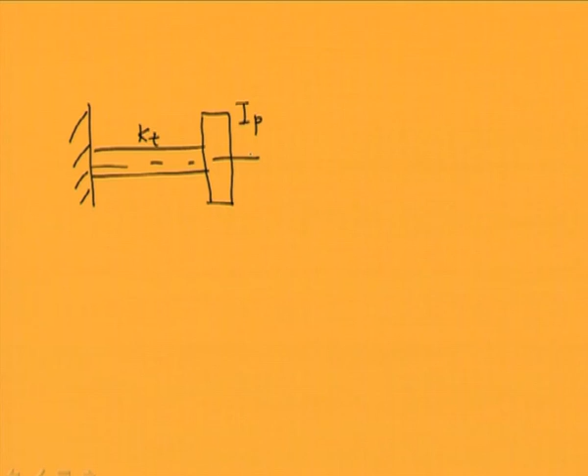If we want to see the torsional vibration in this particular shaft, then the motion of the disc about its own axis is called the torsional displacement. This particular displacement will be time dependent, and the disc will be oscillating about its mean position with this displacement.

So to analyze the dynamics of this particular disc, we need to obtain the free body diagram of this particular disc. Let us say this is the direction of the displacement we have given to the disc.

So opposite to this, we will be getting a force which will be given by the shaft to the disc, and from Newton's second law we are able to obtain the equation of motion of this particular disc.

So the sum of the external force acting on this particular disc can be written as: the external force acting onto the disc should be equal to the inertia moment of the disc. This is the inertia moment of the disc.

So the equation of motion can be written as this - this is a more standard form of the equation of motion.

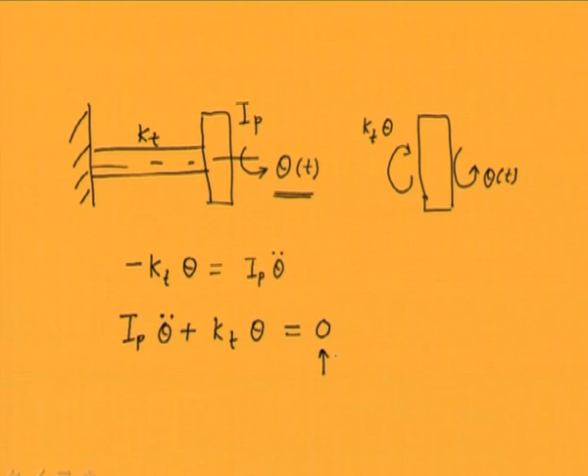This particular equation of motion is homogeneous since we have no forcing in the system, and the solution of this we expect to be harmonic motion because the system is undergoing free vibration.

So the solution can be assumed as amplitude and some harmonic term like this, and here we can substitute the solution in the equation of motion. For that we need the double derivative of the solution, so both quantities we will be substituting in the equation of motion.

So we will get it in simplified form. Now, since theta cannot be 0, for a non-trivial solution the quantity within the bracket should be 0, and that will give us the natural frequency of the system.

This, where kT is the torsional stiffness of the system, and IP is the polar mass moment of inertia of the disc.

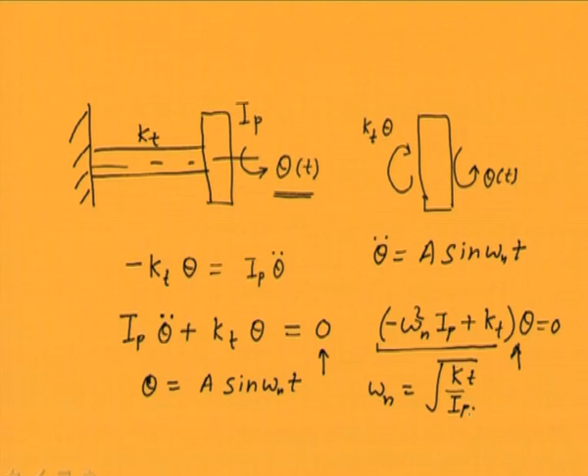Let us consider another system in which we have two discs connected by a single shaft.

So this is disc 1 having polar mass moment of inertia IP1, and this is another disc having polar mass moment of inertia IP2. The stiffness of the shaft is, let us say, kT.

Now to analyze this system we need to draw the free body diagram of both the discs first, and then we will be writing the equation of motion. This is the free body diagram of disc 1, in which the first disc is having displacement theta 1, and the second disc is having displacement theta 2.

This is the positive direction of theta, and there will be a torque from the shaft coming, which is given as this. Here, because the two discs have different displacement, the actual twist of the shaft will be the relative displacement between the two discs into the torsional stiffness.

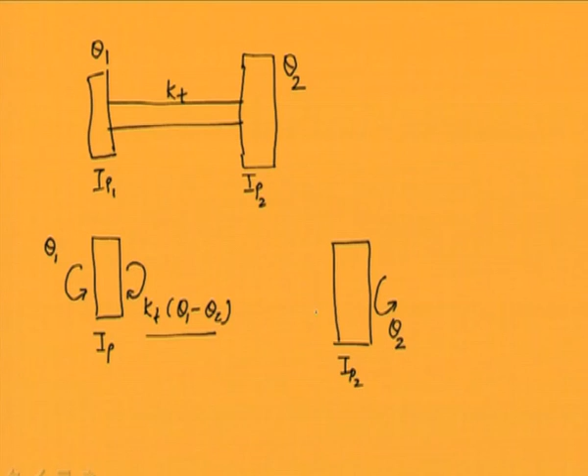Another free body diagram, of disc 2, can be drawn. Here let us say it is having displacement theta 2, and will be having a torque which will be opposite to the displacement direction, given like this.

Now using these two disc free body diagrams we can obtain the equation of motion. Let us consider the first disc. We can write minus kT is the external torque on disc 1, which should be equal to the inertia term of disc 1, which is IP1.

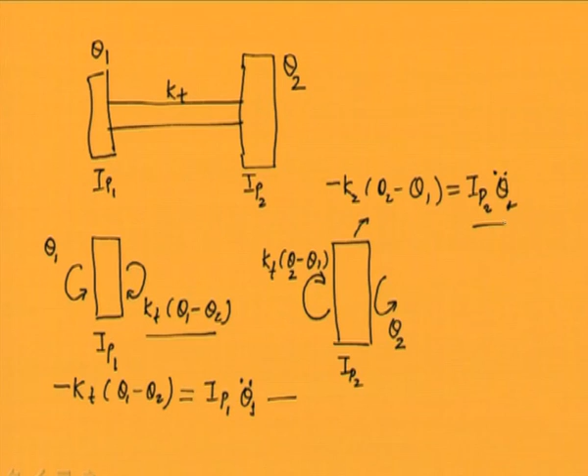For this particular disc we can write the equation of motion on similar lines, and for the second disc as well. These two equations can be written in a standard form like this. Now these two equations are the equations of motion of the two discs.

The solution for that we can assume as a harmonic motion taking place, because we are looking into the free vibration of these two discs. So this is the solution for the free vibration for both discs, as we did for the single degree of freedom system also.

These two solutions can be substituted in the two equations of motion, and that will give us a solution in this form. I have put these two equations in a matrix form, and the entries in the matrix will be the natural frequencies.

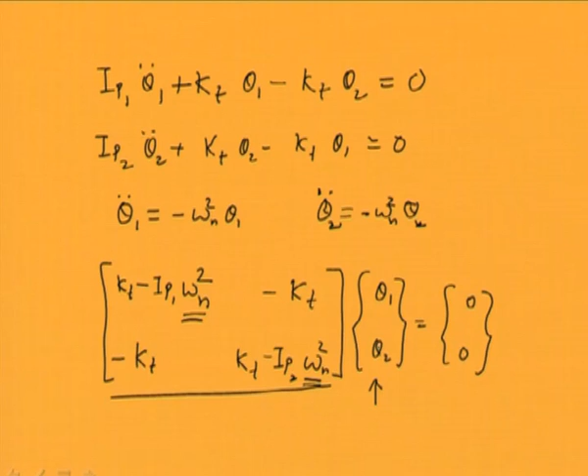For that we have to go back to the previous equation, in which we will be substituting omega n in these terms, and then we will be solving for theta 1 and theta 2. So let us take the first equation.

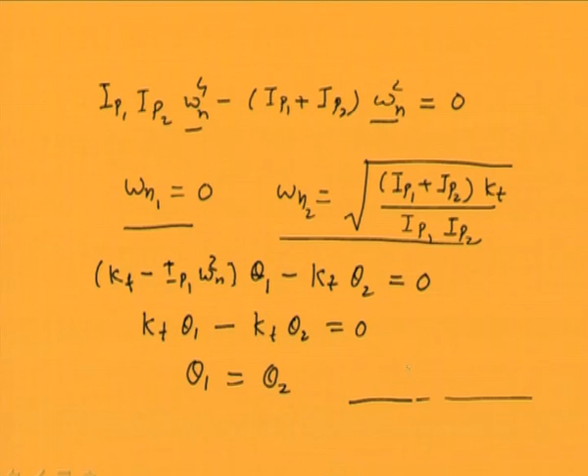So when we substitute omega n equal to 0, we get kT theta 1 minus kT theta 2 equal to 0. You can see that we got theta 1 equal to theta 2 for this, and if we want to draw the mode shape, this is corresponding to theta 1, this is corresponding to theta 2 — they are equal. So this is the mode shape for the first natural frequency.

This corresponds to the rigid body mode, in which we do not have any twist of the shaft. Both the discs have the same displacement, so there is no twist of the shaft, and it has no practical value, because no stresses are generated in the shaft. Let us see the second mode shape, which has some practical value.

So we again write the same equation, and here instead of omega n square we substitute the actual value of the natural frequency. If we solve this equation, let us solve at least one more step on this.

You can see that this term gets cancelled, so this equation is getting simplified. So kT times IP2, minus IP1 kT minus IP2 kT, theta 1 minus kT theta 2 equal to 0. So here this particular term is again getting cancelled.

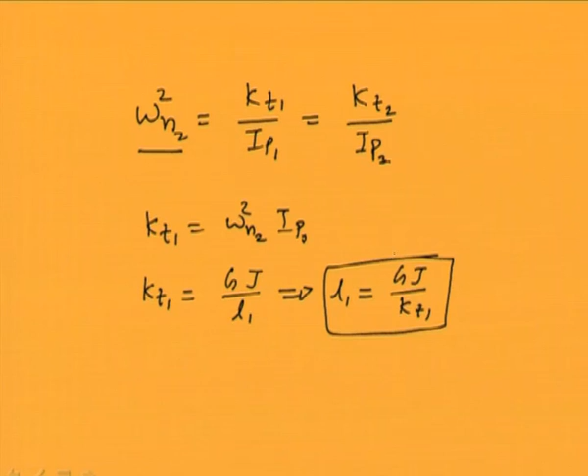On the same line we can also obtain the position of the node from this, but this is a redundant equation.

Now we will consider another kind of system in which two disks are there, but the shaft has different dimensions in between. This type of shaft is called a stepped shaft, because in some applications we may find these kinds of shafts. Let us first see the system.

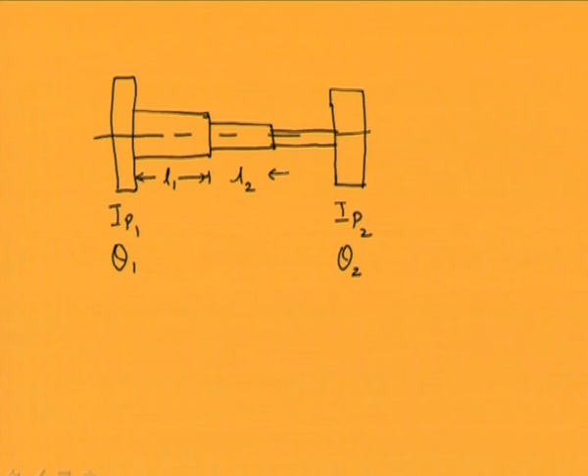This is the axis of the shaft. This is one segment of the shaft, then there is a step like this, then another step, and then there is a disk here. So disk ip1, ip2, and corresponding displacements are theta 1 and theta 2. Let us say the lengths of these are given as this, and they have different diameters also.

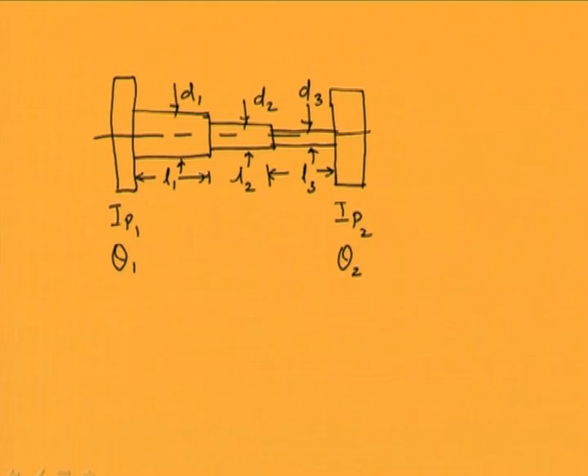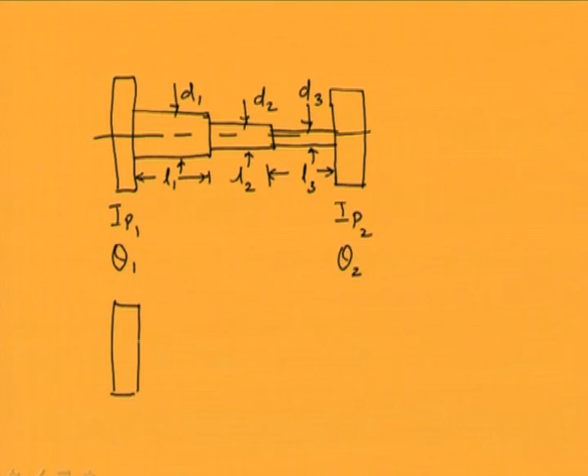This particular system is exactly similar to the previous case, only the difference is here we have different shaft diameters. So it will be very good if we can convert this system to an equivalent uniform shaft system, that means converting this particular system to a system like this.

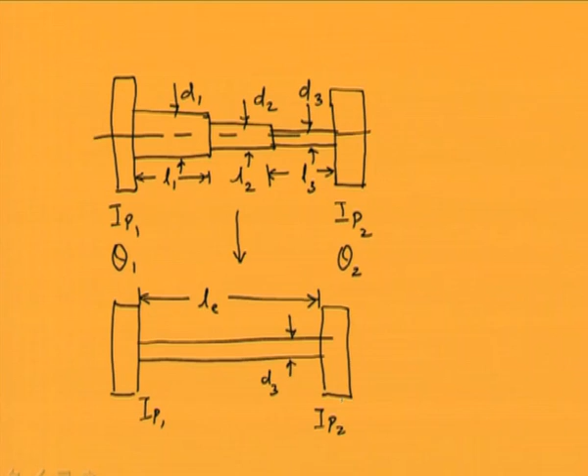Let us say this equivalent shaft diameter is d3, and this is the equivalent length of the shaft. So if we can convert this system to this, then the analysis which we performed in the previous section is valid. Let us see how we can do it.

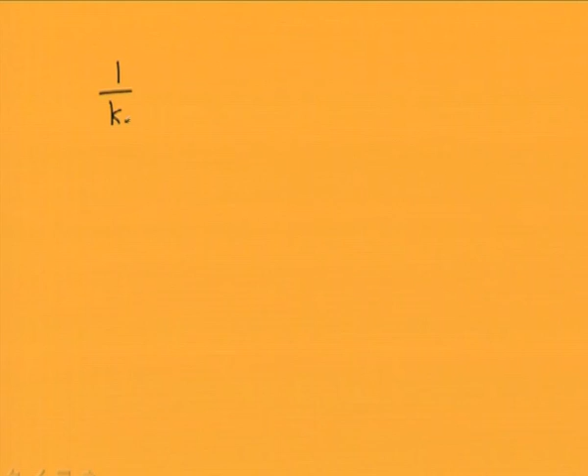To convert the stepped shaft into a uniform shaft, the main aim is that because the shaft gives only the stiffness for torsional vibration, if we can have some kind of equivalent stiffness, then we can obtain the equivalent system.

Because these stepped shafts are connected in series, we can write the equivalent stiffness of the uniform shaft like this, because we have 3 stepped shafts. These are the torsional stiffness of the 3 stepped shafts, and this is the equivalent stiffness of the overall system.

This can be expressed because we know K is given by Gj by L, where G is the modulus of rigidity, J is the polar moment of area, and L is the length of the shaft segment. Using this equation, it can be converted, and because G is common, I have eliminated it from both sides.

Which can be written as like this.

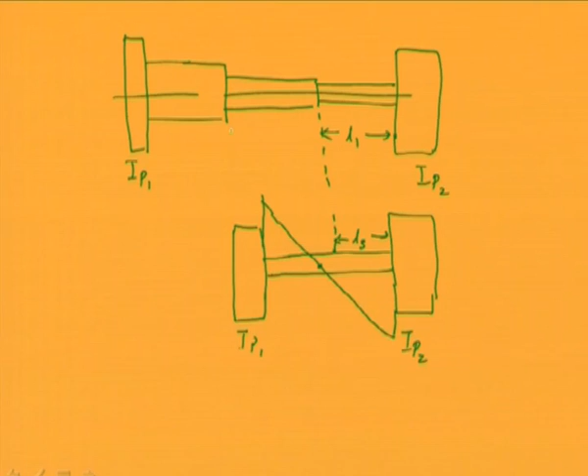the various positions of the shaft onto the equivalent system, if this is L3 in the equivalent system, that will remain L3. Corresponding to this second segment, let us say this is L2, and this is L equivalent. And the third one is corresponding to L1 equivalent; in the actual system it is L1.

Now let us say the position of the node on the equivalent system is A from this position LE1. So in the equivalent system we can locate the node position as we did in the previous case.

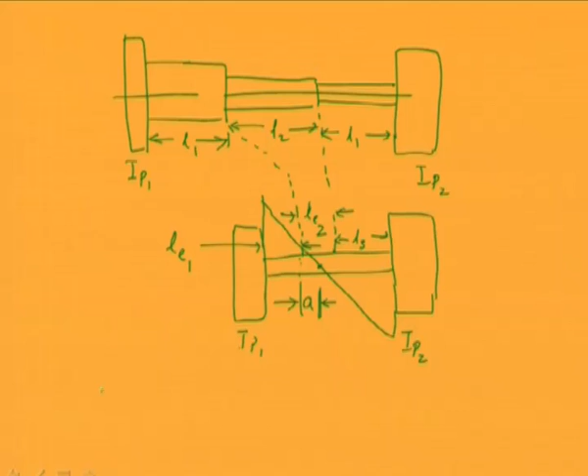Where KT1 is the stiffness of the first part of the system, this one up to this, and from here we can obtain A because other quantities are known. Now we need to find out the equivalence of this in the actual system.

Where is the node in the actual system? To find out the position of the node in the actual system, let us see the previous relations which we had for the equivalent system for segment 2, this. So if A is the equivalent node position for segment 2,

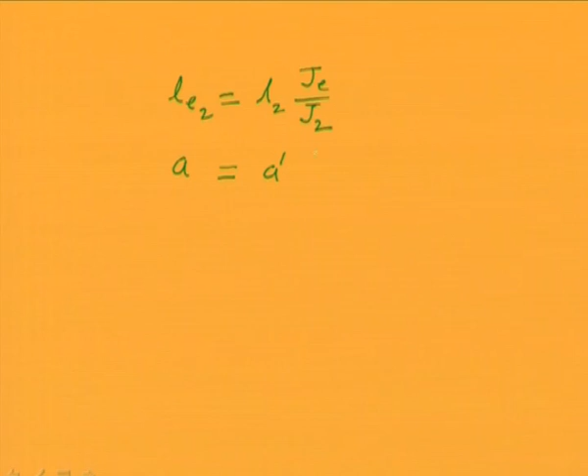then let us say A prime is in the actual system. Similarly, if from the right side of element 2, the node position is given by B in the equivalent system and B prime is in the actual system, then we can have this relation.

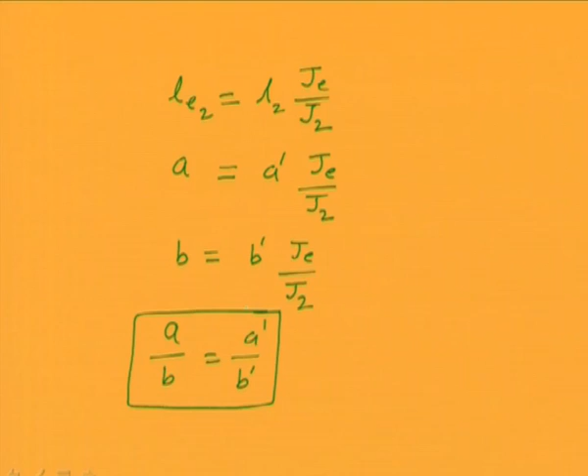And if we take the ratio of these two equations, we will get A by B is equal to A prime by B prime. So you can see that once we have located the node in the equivalent system, in the actual system also the node positions will be there in the same proportion, where A prime will be this and B prime will be this.

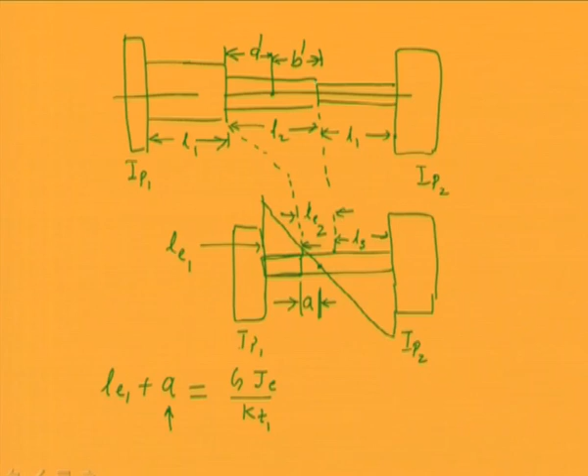Now we will consider the 3 rotor system, and in this particular 3 rotor system the basic principle of the 2 rotor system is equally valid here. Here 3 rotors are connected by 2 shafts, so if we want to see the motion, especially how they will be vibrating in free or normal modes,

either they can have one node in between the shaft or they can have 2 nodes in the shaft. If they have one node in the shaft, then obviously the 2 extreme discs will be having opposite phase. This will be seen in more detail. And if there are 2 nodes in between the shaft, then the 2 discs at the extremes will be having the same phase. So let us see this particular analysis.

So this is one rotor connected by a shaft. This is another rotor. For simplicity we are considering the uniform shaft, but we can also take non-uniform shafts, though then we have to go for the equivalent system in that case.

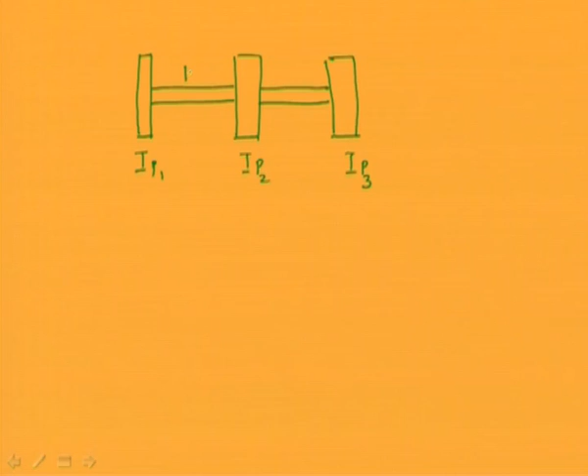So let us say their mass moment of inertia are like this, and these are the torsional stiffness of the shaft. Lengths of the shafts are, let us say. Now,

if we directly want to go for the mode shape analysis first, and then from there we will try to find out the natural frequency of the system. Let us say there is only one node in this particular system, then how does the mode shape look like.

So let us say the node is here. So this is the mode shape which will be. So here we have theta 1, theta 2, theta 3. Theta 3 is negative. As I said earlier, when there is one node, then theta 1 and theta 3 will be having opposite phase.

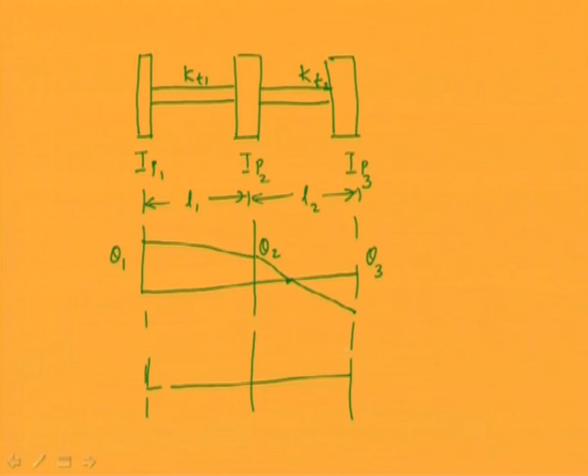In another case, when we have two nodes, one node is here, another node is here. Let us say the position of those nodes are LA from the left hand side and LC from the right hand side. On the same lines, we can write this as LC is the position of the node from the right hand side.

This is regarding the mode shapes. We have seen that it can have either one node in between the shaft or two nodes in between the shaft. So let us consider the general case when it has two nodes in the shaft. How can we analyze this?

The left part of the shaft will be a cantilever because there is no displacement at this point, so we consider this as a cantilever beam. Similarly, the extreme right position can also be considered as a cantilever beam. In between, the middle portion will be a fixed rod with the disc in between those fixed ends. So there are three systems now, but because they are vibrating in natural mode, the natural frequency of all these systems will be the same. Let us write these equations of motion one by one.

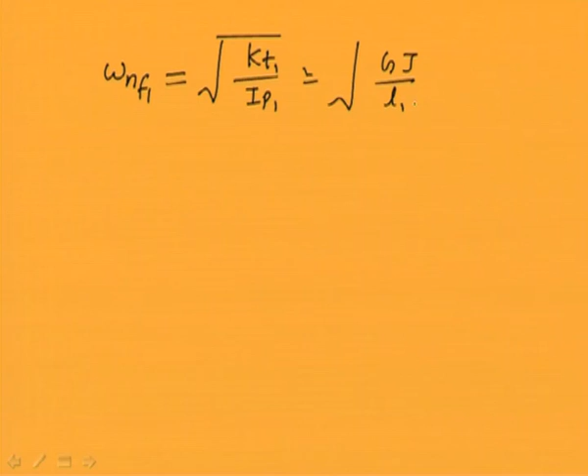For the disk at the extreme left, we can write the frequency equation as shown, and if we substitute for the torsional stiffness, because L1 is the length of the left hand side cantilever beam.

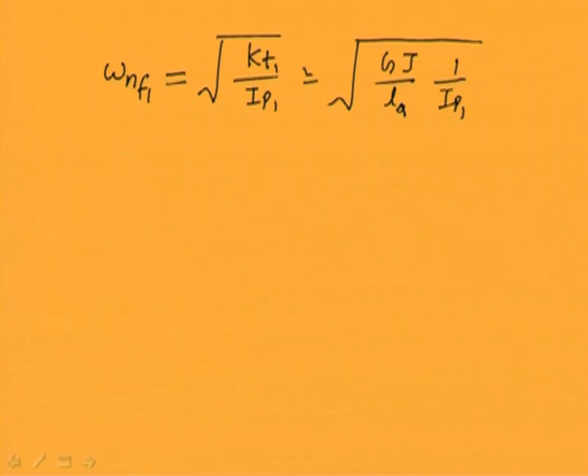On the same line, we can write for the third disc, and this is the natural frequency for the third disc. For the middle rotor, we have the natural frequency, where this kt2 is given as shown.

Now these three frequencies for the three discs, because they belong to the same system, their natural frequency should be the same. So we can equate these three equations, and our aim is to obtain either LA or LC. Eventually, when we equate these three equations, we get a quadratic equation in terms of LA or LC. Let us see the steps.

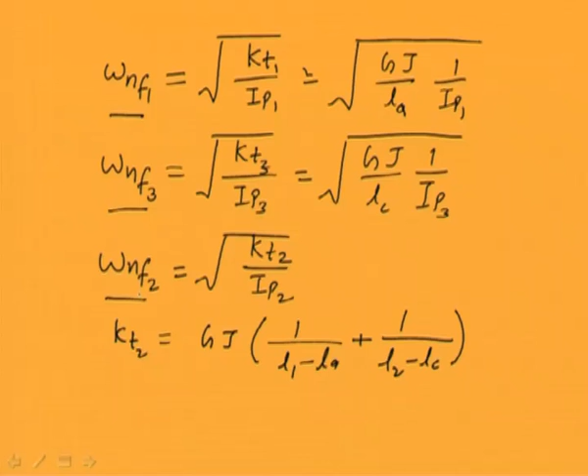If we equate the natural frequency of the first disc and the third disc, we get this equation. And if we equate the natural frequency of the first and the second disc, we get an equation which can be written as shown.

This particular equation contains both LA and LC, so from this equation we can eliminate LA. To do this, we substitute LA equal to LC times IP3 by IP1, and if we substitute this here, here and here, and solve it, we get the following equation.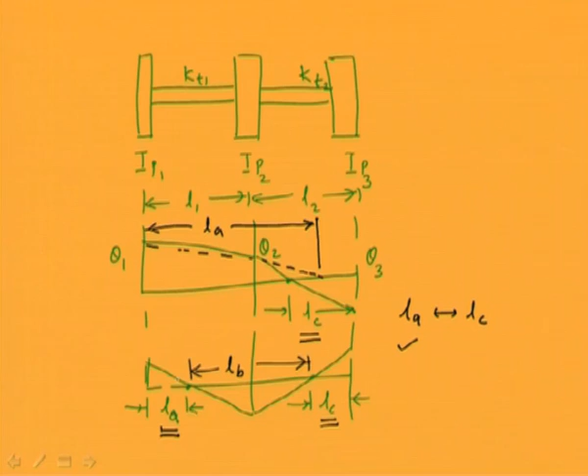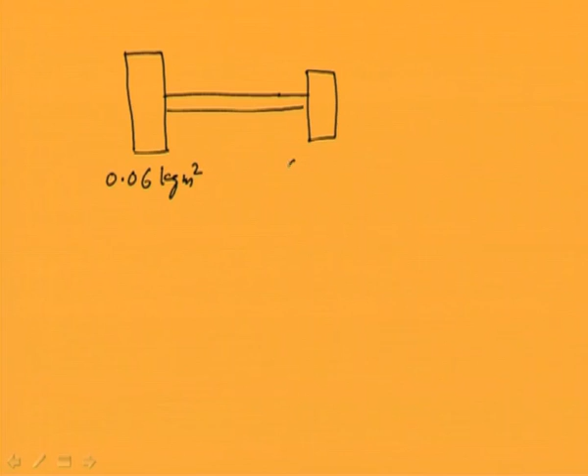Now let us consider some examples so our concepts become clearer. First we consider a two degree of freedom system. The first shaft has a mass moment of inertia of 0.06 kg meter square, the second shaft has 0.02 kg meter square, the diameter of the shaft is 0.1 meter, and the length of the shaft is 0.6 meter. We need to obtain the natural frequency of this system.

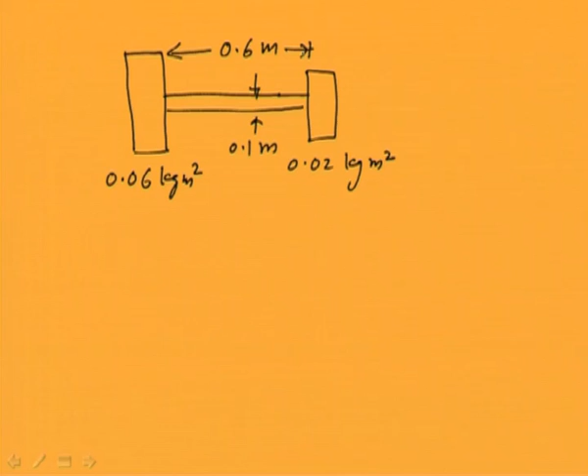Let the modulus of rigidity be given as 0.8 times 10 to the power 11 Newton per meter square. With this information we can calculate the polar moment of area of the shaft. Since we know the diameter, it comes out to be this much.

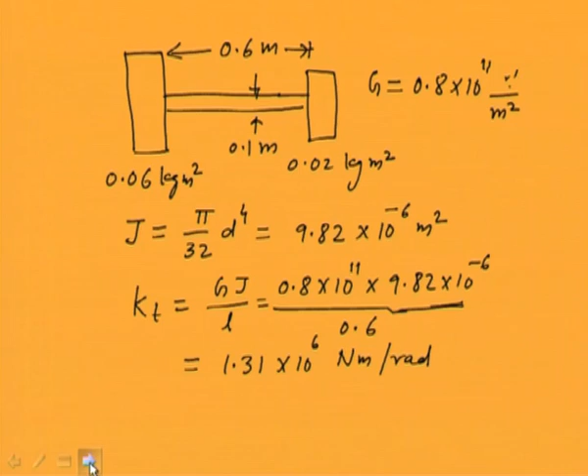Because the torsional stiffness is given by G times this expression, we can substitute these quantities here. The length of the shaft is 0.6, so this gives us the stiffness of the shaft as shown, in Newton meter per radian. Now we will substitute these values in the natural frequency equation.

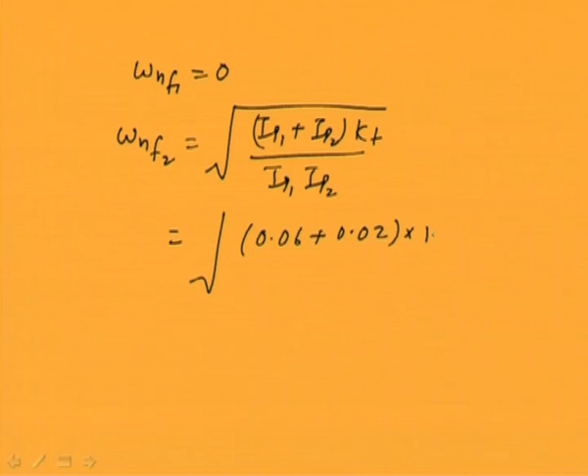The first natural frequency remains 0, the rigid body mode. The second natural frequency we obtain is IP1 plus IP2 times kT divided by IP1 IP2. Substituting these values: 0.06 plus 0.02, into 1.31 times 10 to the minus, 10 to the 6, divided by 0.06 into 0.02, this gives us 9345.3 radians per second as the second natural frequency.

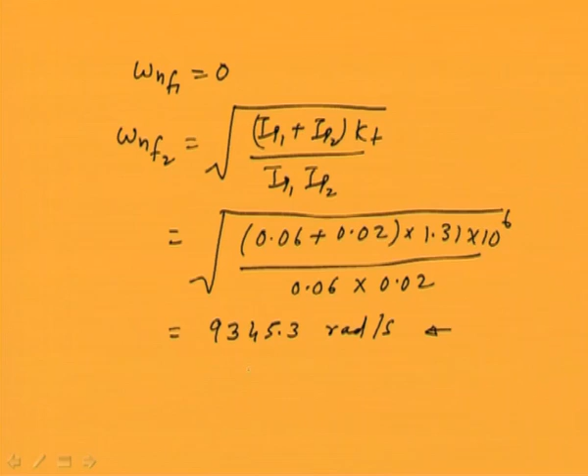This natural frequency is quite high, in the range of 9000 radians per second, compared to transverse vibration, where generally these natural frequencies are very high. Now let us see the mode shapes.

Corresponding to the first natural frequency, both displacements will be the same. So the mode shape remains like this, both theta 1 and theta 2 are same.

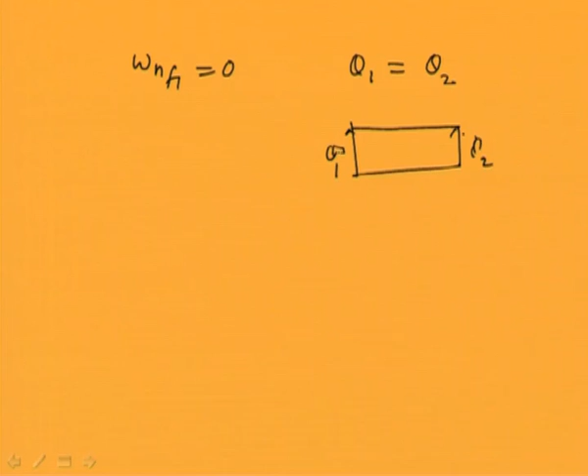Corresponding to the second natural frequency, we will be having a mode shape which is 0.06 by 0.02, minus, so it comes out to be minus 3. So the mode shape will be something like, if we have 1 here, the second will be having minus 3 displacement. This is corresponding to the second natural frequency mode shape.

Now we will consider another kind of system in which gears are there, and in such systems also we face the problem of torsional vibration. Our aim here would be to obtain the natural frequency of the system so that we can avoid any resonance condition. In these kinds of systems, because of the gear, we will be having different speeds of the shafts, due to the gear ratio, so there will be either speed reduction or speed increase in the shaft.

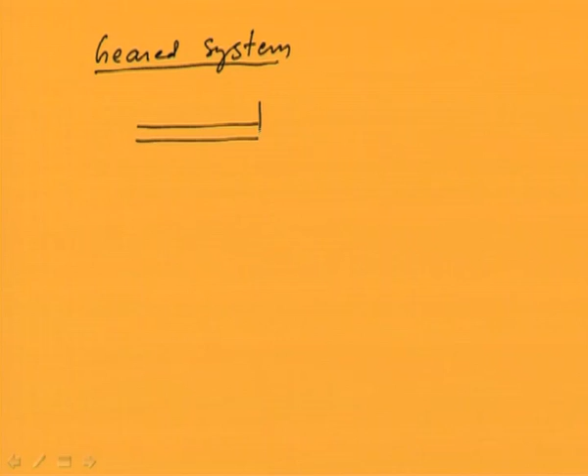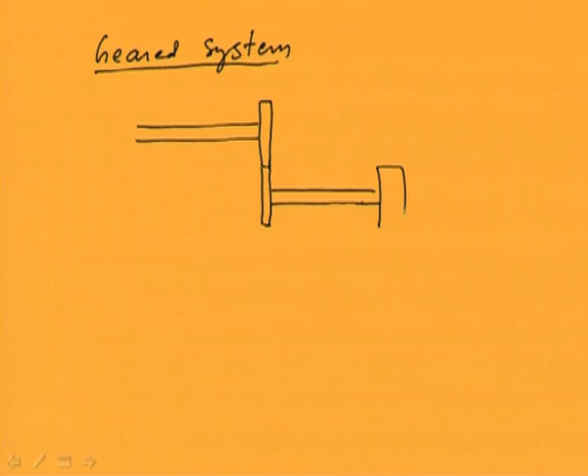Let us say we have one shaft connected by a gear, and then with another gear we are transmitting torque to another shaft. Let the mass moment of inertia of this particular rotor be IP2, and here there is another rotor or disc having mass moment of inertia IP1. We are assuming that the polar mass moment of inertia of the gears is negligible, but later on we can add that also. For simplicity in this analysis, we are not including the polar mass moment of inertia of the gears.

So this is the gear system in which we have speed of this shaft as omega 1. The twist of gear 1, the torsional displacement of gear 1, is theta 1, and the torque coming onto the shaft at gear 1 is, let us say, T.

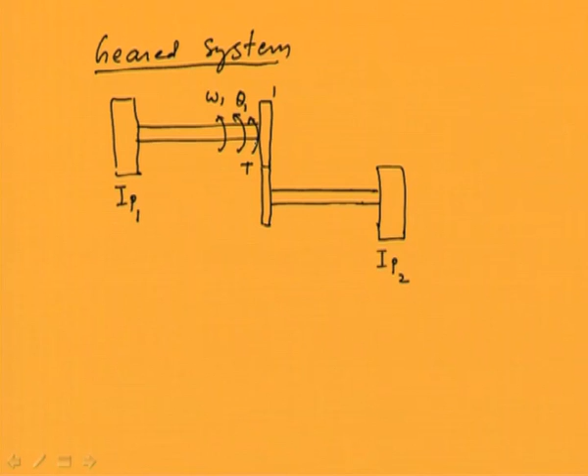Now, because of this gear pair, there will be a change in the angular velocity of shaft 2, let us say that is omega 2, and there is a change in the torque, that is Nt, where N is the gear ratio. There will also be a change in the angular twist of the shaft, let us say theta G2, which is related to theta G1 by the gear ratio. Actually this is theta G1, to distinguish between this rotor and the gear displacements. Now we want to analyze this particular gear system.

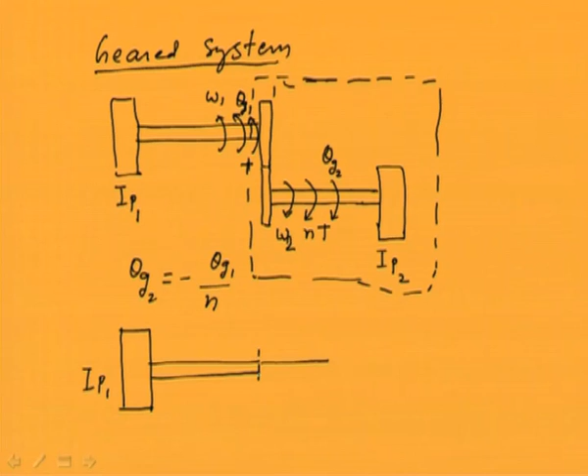So if we consider this particular system enclosed in a black box, we want to find out an equivalent system in which, let us say, this is IP1, this is the shaft, and after this, corresponding to this particular box, we have an equivalent stiffness Ke and an equivalent polar mass moment of inertia.

So if we can convert the geared system into this particular system, we find that we already analyzed this two disk system. So our analysis will be valid, whatever we covered previously, for the geared system also, if we can find the equivalence. So our aim would be first to obtain the equivalent system of the geared system, and here, for finding the equivalence, we will be having two quantities of concern.

One is the strain energy in the system, so whatever strain energy is there in the original system should be equal to the strain energy in the equivalent system. Similarly, the kinetic energy of the actual system and of the equivalent system should be the same, and based on these two energies we will obtain what should be the equivalent stiffness of the equivalent system and what should be the polar mass moment of inertia of the equivalent system.

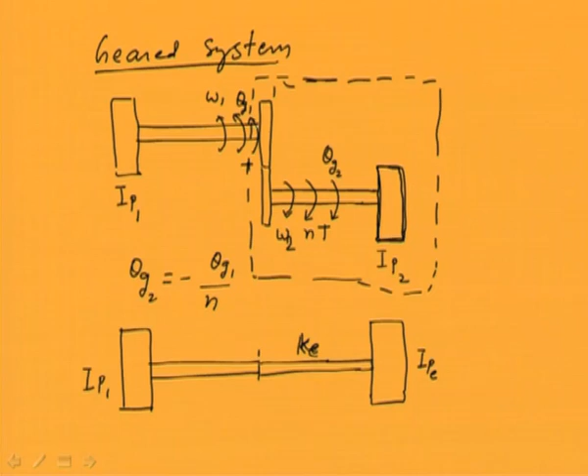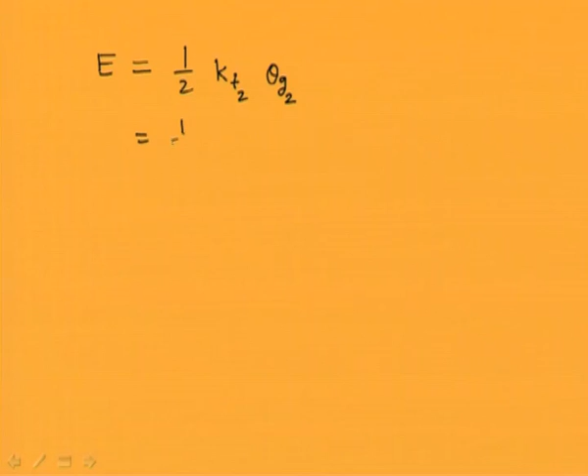So what we are doing is fixing the IP to the disk 2 by some means, and we are giving gear 1 a theta G1 displacement. We will try to find out how much strain energy is stored in the shaft 2, given by half the stiffness of the shaft times the angular twist theta G2 squared. We have the relationship between theta G1 and theta G2 like this, and since this is squared, the minus sign has no meaning here. So this is the strain energy stored in the actual system.

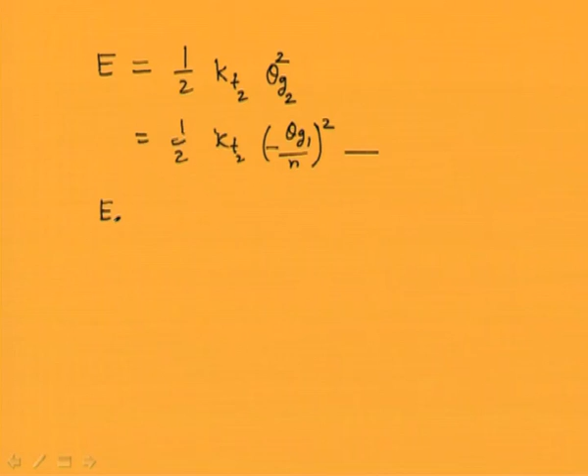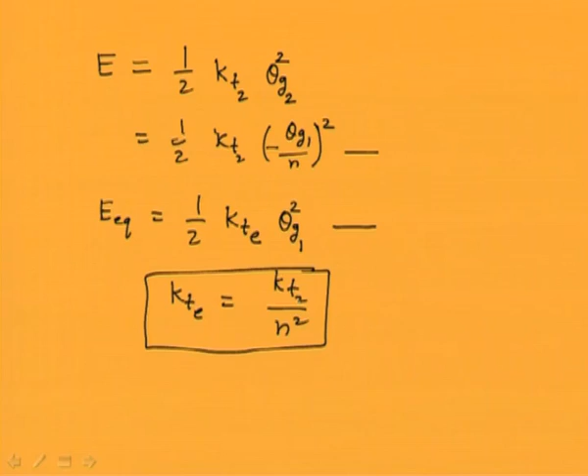Now the strain energy in the equivalent system can be written using the torsional stiffness of the equivalent system, getting the same twist as gear 1. If we equate these two energies, we get this relationship: if we divide the torsional stiffness of the actual system of shaft 2 by the gear ratio square, we get the stiffness of the equivalent shaft system.

To find the equivalent polar mass moment of inertia of the equivalent system, we have to equate the kinetic energy of the actual system and the equivalent system. So first let us see the kinetic energy as omega 2 prime square, where omega 2 prime is nothing but the actual speed of the rotor plus its angular twist.

And the kinetic energy of the equivalent system can be written as omega 1 equivalent square. Here omega equivalent is omega 1 plus theta G1 dot, which is the angular displacement of gear 1.

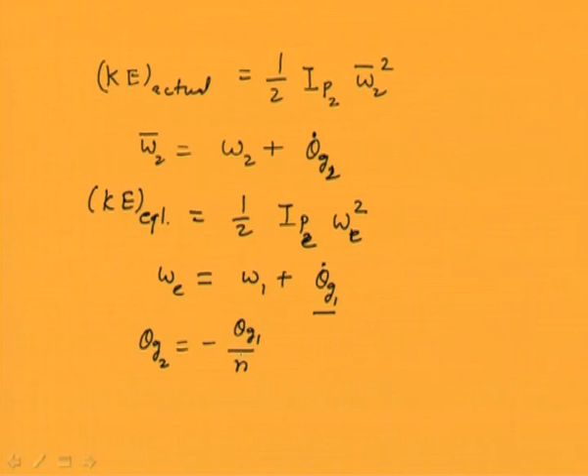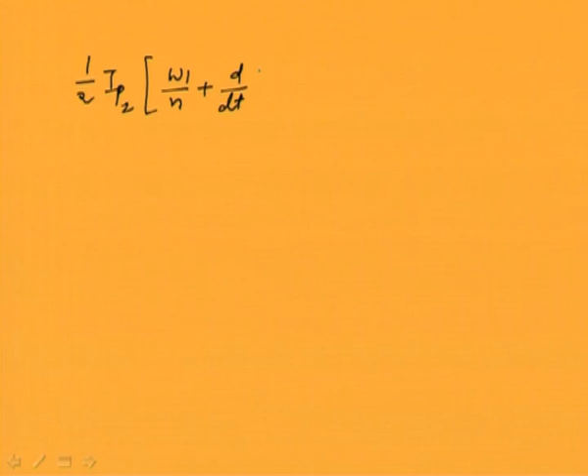Now because we have a relationship between gear displacement 1 and gear displacement 2, we can substitute these equations in the kinetic energy and equate them. So this is the kinetic energy of the actual system, in which we replace omega 2 by omega 1 by n, plus theta G2 replaced by this quantity, which is theta and its time derivative, and the whole thing squared, should equal the kinetic energy of the equivalent system.

Now if we simplify this, we can see that the equivalent polar mass moment of inertia comes out to be IP2 by n square. So here also we can see that the polar mass moment of inertia of the equivalent system can be obtained if we divide the polar mass moment of inertia of the actual system by the square of the gear ratio.

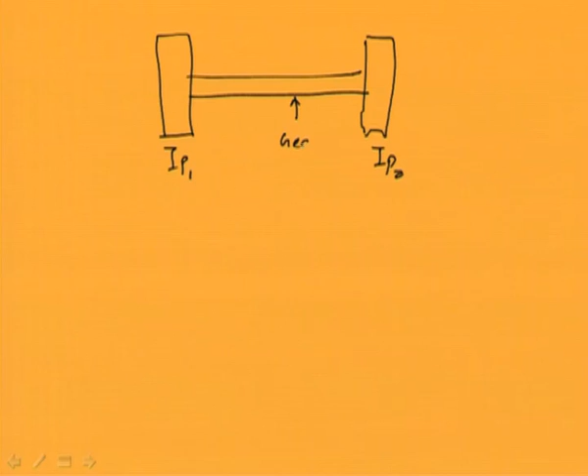Once we obtain the equivalent system, which has one disk here, another disk here, and the gear somewhere here, since we already analyzed this system previously, the mode shape can be obtained from this. This particular mode shape is for the equivalent system.

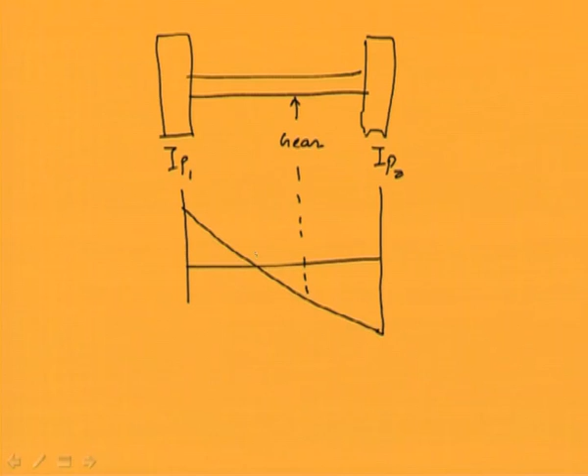Now how do we obtain the mode shape for the actual system? Because this is the location of the gear, and this is the node position where no displacement is taking place, for this case the node comes before the gear here. Let us see what correction we need to make on this mode shape to get the actual mode shape. Up to this point there is no change, because there is no change in the speed of the shaft up to where the gear is.

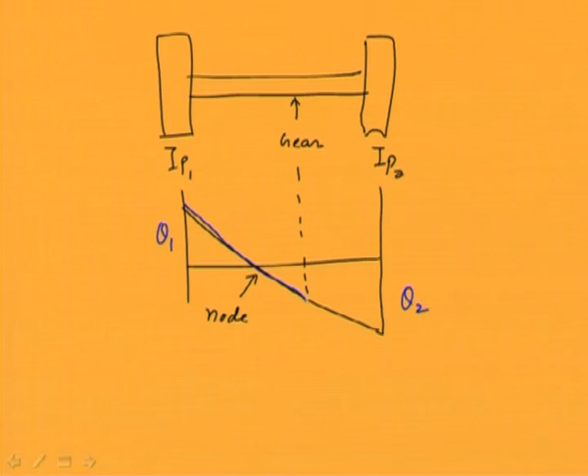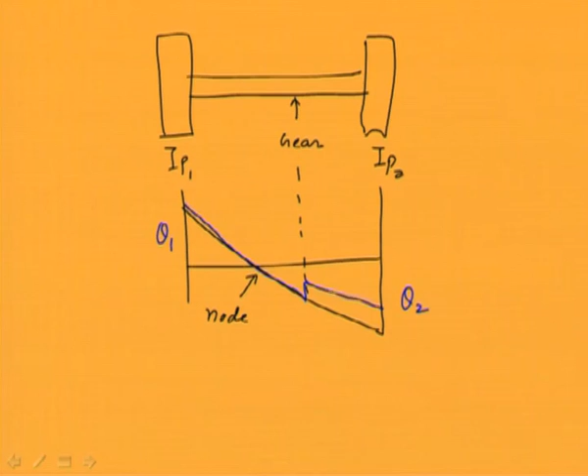After this point, because the displacement is theta 1 and theta 2, whatever displacement takes place in this range has to be divided by n, the gear ratio. So the mode shape will change like this - you can see there is a step change in the mode shape at the gear, and this modification needs to be incorporated because we converted the actual system to an equivalent system for analysis. To get the mode shape in the actual system, this modification has to be considered. This is an important aspect to consider in this case.

In this lecture, we have seen the introduction to torsional vibration. We considered single degree of freedom systems, 2 degree of freedom systems, 3 degree of freedom systems, and then we have seen how we can analyze geared systems in which the two shafts have different speeds. In the next lecture, we will consider more general methods available for analyzing multi degree of freedom systems.